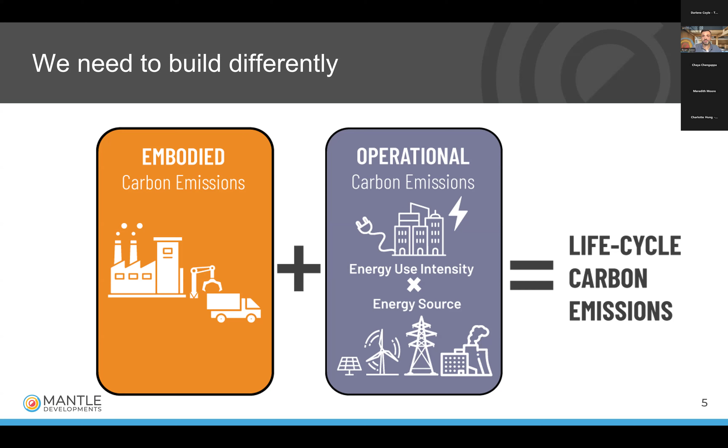So to jump right into the embodied carbon discussion, increasingly we're describing the carbon footprint of buildings as having two aspects. One is the operational carbon emissions, associated with operating the building, so heating, cooling, lighting, ventilation. This is what we've been managing as an industry for the past 15 to 20 years through energy efficiency requirements in the building code and through decarbonization of the energy system. But we're increasingly realizing there's a very large carbon footprint with creating the materials and creating the buildings. That's what we mean when we say embodied carbon emissions. And we want to manage both of these.

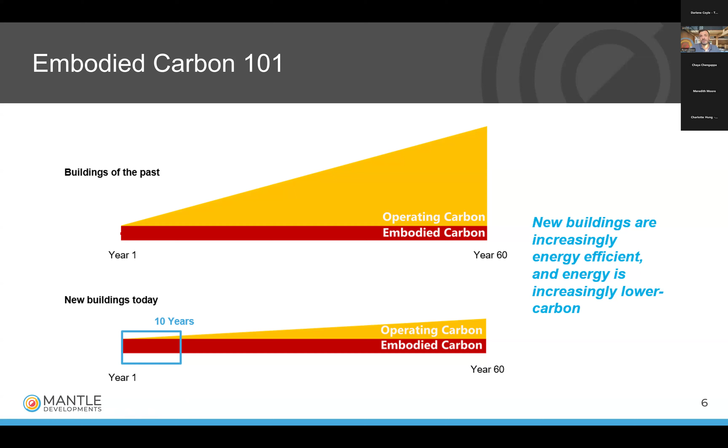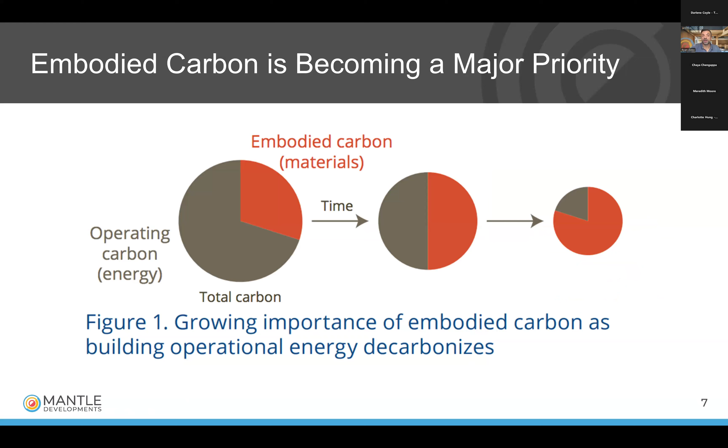When you add all those elements together, we're seeing a massive reduction in operating carbon, but very small change in embodied carbon. Looking at shorter time frames, maybe the next 10 years, new high efficiency buildings in low-carbon grid environments like Ontario have emissions that are almost all embodied carbon. Put another way, we're reducing operating carbon so effectively that in the not too distant future, the vast majority of a building's carbon emissions will be embodied carbon from creating the building.

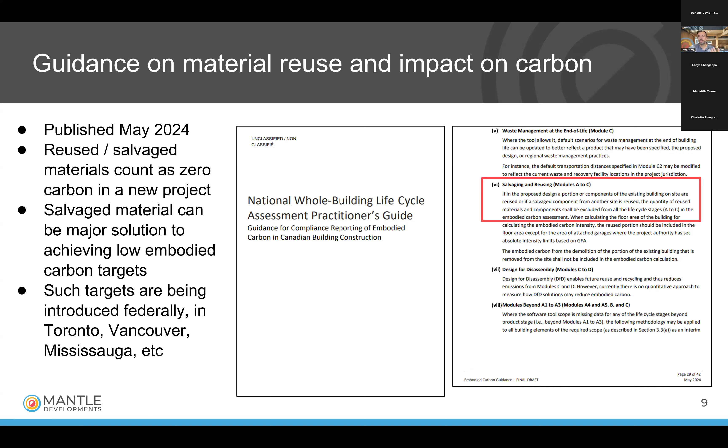As those caps come down over time, and it becomes increasingly hard to hit them as we have to do more to be low embodied carbon, using more salvage material will be one of the best and most cost-effective ways to reduce your carbon footprint, because it counts as zero carbon on your calculations. So that's the quick summary on LCA and embodied carbon.

I'll talk specifically about this toolkit that we've developed over the last year and a half. My team at Mantle and Kelly Doran's team at Half Climate Design has worked with the City of Toronto, including funding through the Atmospheric Fund.

We basically looked at how embodied carbon could be reduced through three different lenses that haven't been looked at previously in the Toronto area before. We wanted to look at how urban design can actually impact embodied carbon, so how things like amount of underground parking, overhangs, or step backs of a building. Those are all urban design requirements, but all of them have unintended embodied carbon impacts. So Half looked into that.

And then my team at Mantle looked into items two and three, which was procurement of low carbon materials, so setting some requirements around what a low carbon material might look like in terms of purchasing. But the third one, which is relevant to this discussion, was around circularity and basically how to value the carbon footprint in existing structures and materials.

And think about ways that the city could promote reuse of buildings and reuse of materials. So as part of this process, we looked at what Toronto's currently doing, what are best practices globally around these topics. We had working groups with dozens of people from different City of Toronto divisions that discussed what best practices are out there and how Toronto might be able to implement them. So we've come up with some recommendations that I'll give you just some of the highlights of today.

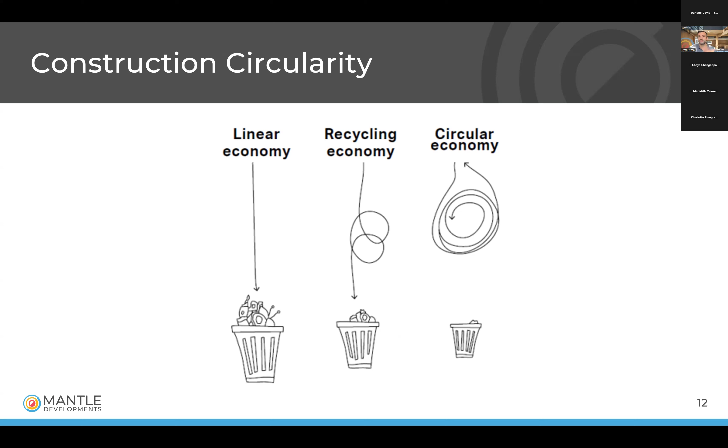And when we say circular construction, I really like this simple graph, which kind of really shows what we mean in a simple way. Instead of just making something, using it in one building's life, and then putting it to the landfill, we want to think about how we can increasingly reuse both the building itself and repurpose a building. But if a building does need to come down, maybe to do it in a thoughtful way to deconstruct it and then to reuse all those materials. So moving from the left to the right into a more circular economy.

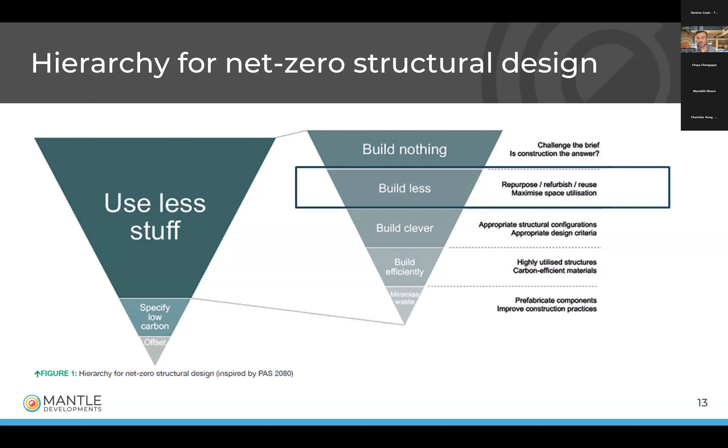And some of you may have seen this hierarchy of zero carbon design and what we can do from a design perspective to reduce the carbon footprint of our buildings. One of the most effective things we can do is to build less, to use less material and to reuse what we already have, right? It's something that we know how to do, we can do it, but our processes aren't set up in a way to incentivize that. And we do have some circularity in Toronto.

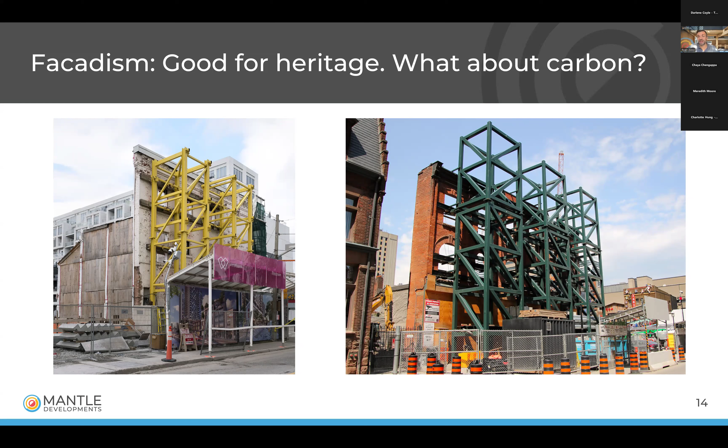So I'm not saying we shouldn't be doing this, but I'm saying if we're going to do this, let's save the structure behind the building as well. Let's save as much of the building as we can and try to find ways to reanimate it and bring it back to life, as opposed to just demolishing everything but investing a huge amount of carbon to save the facade, right? We can do better than this.

And the more I looked into this, dug into this issue over the past year and a half, the more I realized that there are many co-benefits with circularity. I started looking at it from a carbon perspective, but I realized that it really supports local jobs, it improves cultural heritage, it lowers carbon as I knew, but also has much less waste. So there's many benefits associated with reduced landfill impacts, means we need to use less resource extraction to create new materials, and it can lead to faster construction if we can find ways to streamline what's already there instead of going through a whole demolition process and a rezoning and a rebuilding, which can take many, many years.

So the more I learned about this, the more I became a convert and realized there's many co-benefits to successful circularity strategies. So just to touch on some of the very high level recommendations that we proposed to the city.

One is to support ways to have more adaptive reuse of buildings. So instead of demolishing a building, finding ways to incentivize people to use what's there and reimagine them.

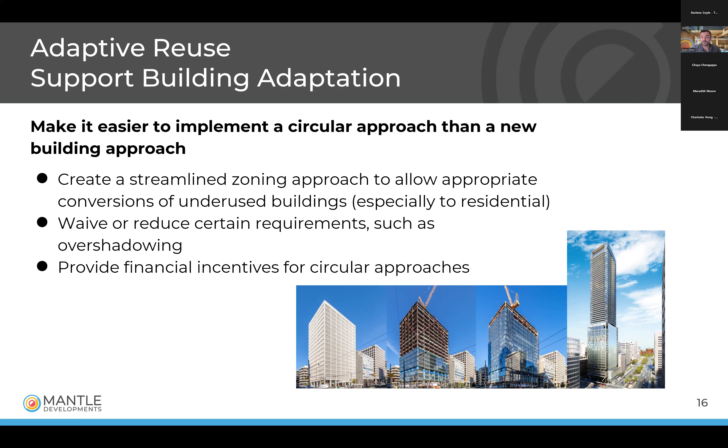Another really interesting thing we saw, especially from leading jurisdictions like New York City and London in the UK, was the requirement of pre-development and or pre-demolition audits. So before a project was approved to be redeveloped or to be demolished, for example, certain projects in those jurisdictions were required to do this audit.

They can be called circularity audits. There's a number of different terms used, but the idea is looking at what's there in a systematic way, recording it, and coming up with a plan to maximize the reuse of those things so that it's a condition of your approval that you have to do this and you have to have a strong plan.

I noted that the top two things on that voting at the start was lack of awareness education and lack of regulation, right? So this kind of ties into both of those, that there's a lack of awareness about regulation in many of these places.

And for example, the city of Toronto says, well, this is a provincial requirement, so it's not up to us to enforce it. And when I speak to the people at the province, they said, well, we just do random enforcement on this, and we look at a couple dozen projects a year to see if they're following it. And they said, most people are not in compliance with this requirement.

So I would suggest one of the things anyone that's involved in building approvals or in projects can do is follow this regulation because it's already there, and think about how we can really maximize what's already being asked for by the province.

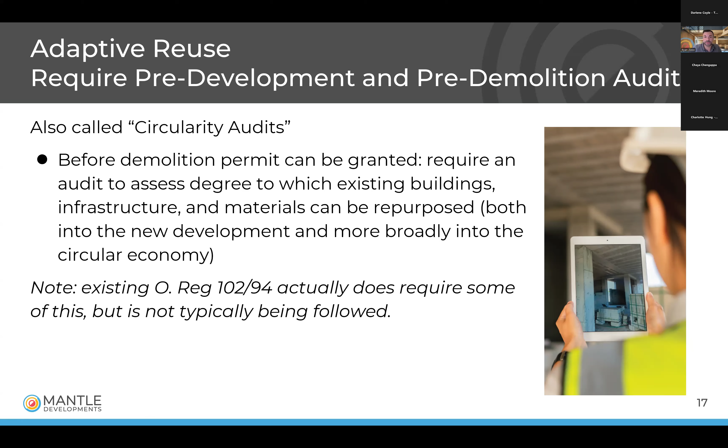There's also a really interesting approach we saw called the circularity decision tree, which, depending on the state of the building or the site, asks a number of questions: is the structure sound, is there cultural heritage here, and other questions that can lead to guidance on whether it makes sense to retain and retrofit the building, do a partial retrofit and refurbishment, or do a disassemble and reuse, or potentially a demolish and recycle.

So we were suggesting you could have a kind of decision tree like this, and then link it so that if you're doing what you're supposed to be doing, quote unquote, by the decision tree, then you get a low development fee, or you get some kind of a refund, because you're doing the low carbon approach. But if, for example, the tree says retain and refurbish, but you're actually proposing a demolition, then maybe you have a 10 times fee, for example.

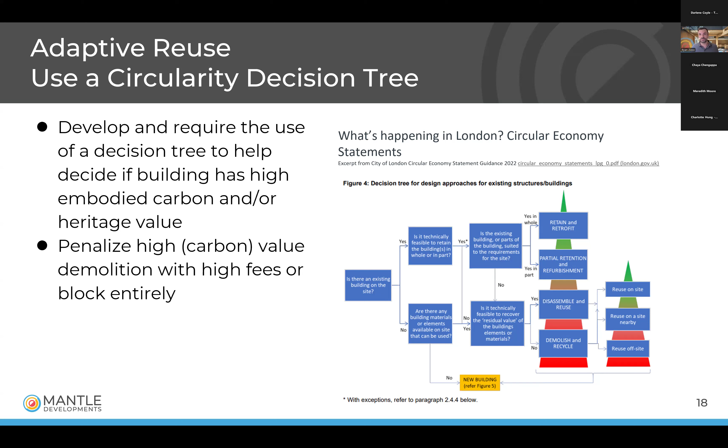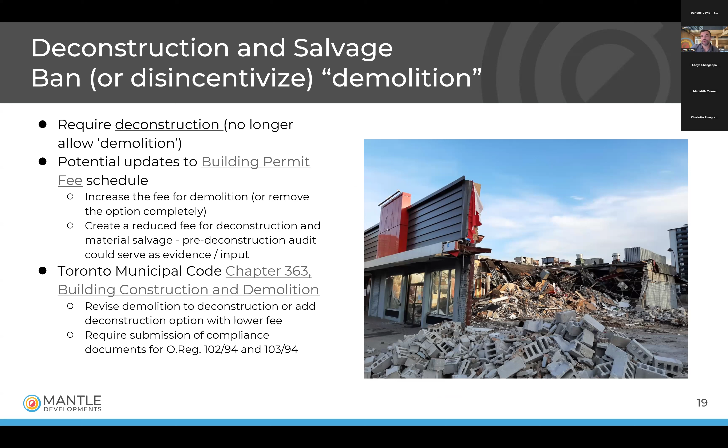So again, linking financial incentives to the lower carbon option. And then also we could talk about just banning demolition and having deconstruction and salvage instead, which is what Meredith is going to talk more about. We see more than 6 or 7 municipalities now in North America that have banned demolition and require deconstruction. So we went into some detail with the city on what specific building permits, municipal code, and bylaws they should revise if interested in moving forward with this.

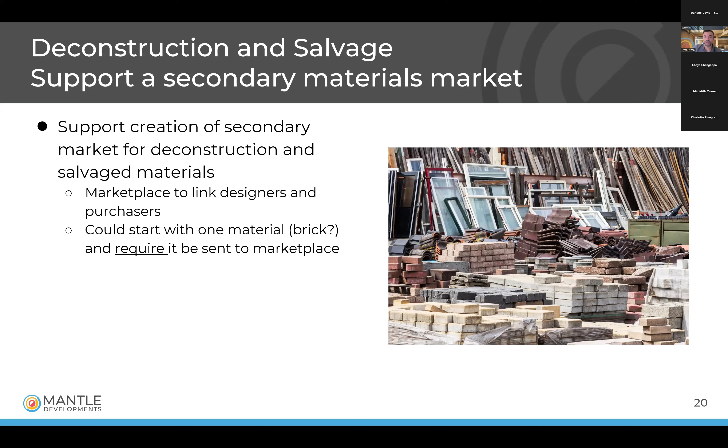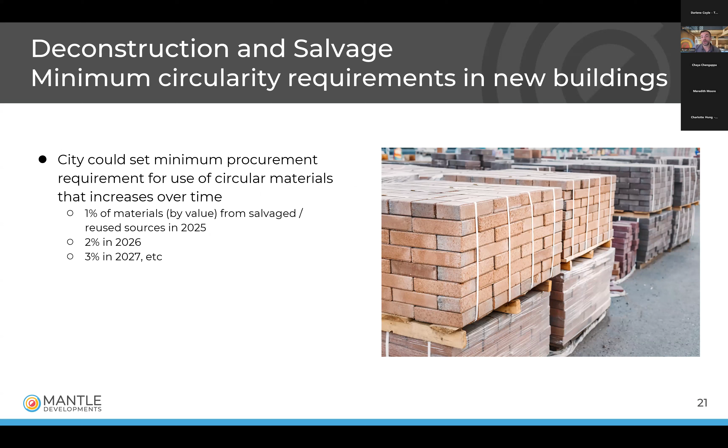We can also require more market development of secondary materials. That was something we heard from the project partners and Project Green team, and Meredith can speak more to that as well. Or if you're doing procurement of new buildings, thinking about requiring a minimum amount of salvage material—an easy procurement requirement could say 1% of materials on this project should come from a reused or salvage source, and ratcheting that up over time. These types of requirements in procurement documents would provide more demand for these types of materials in the market. So very interesting policy decisions could be made through that.

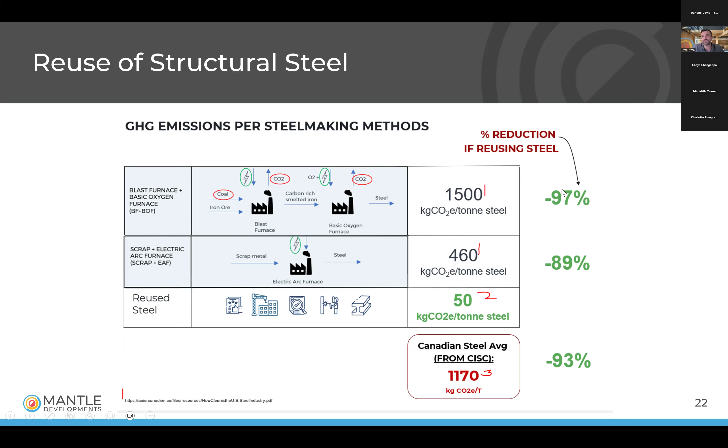This is just a slide I got the other day from someone working on a structural steel reuse project at the Parliament buildings in Ottawa, the Center Block, where they're taking out structural steel, having it refinished, new connections put in, and then reusing it in the structure. They're finding it's basically a 93% reduction to reuse the steel versus average steel from other mills, and if it's new production from a blast furnace, it's a 97% reduction. So we're talking about massive carbon savings by reusing these materials.

This toolkit is going to be published on our website within the next week or two—it's not there right now. There are some preliminary findings on the website now, but we're waiting for final approval from the Atmospheric Fund, the funder, to put it up. So feel free to check back at our website in a couple of weeks, or reach out to me by email and I'd be happy to send it to you once it's available. I'm going to end it there, and we can take questions after, but I'll hand it over to Meredith now. Thank you.

As Ryan mentioned, my name is Meredith Moore. I'm the founder of Ouroboros Deconstruction, and I'm excited to be here today to talk to you about deconstruction and material reuse and how it can play a part in making construction circular.

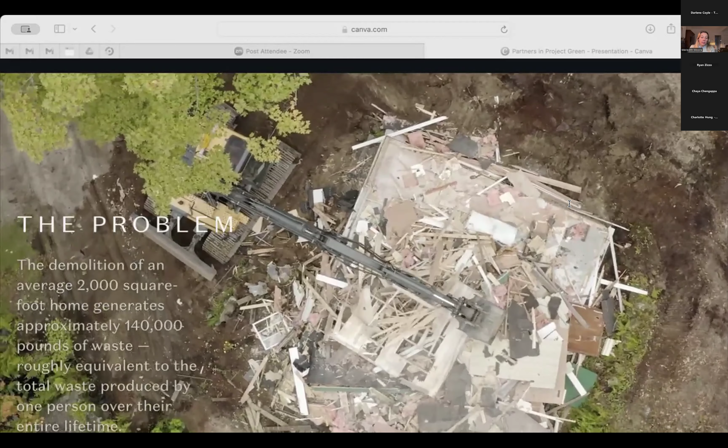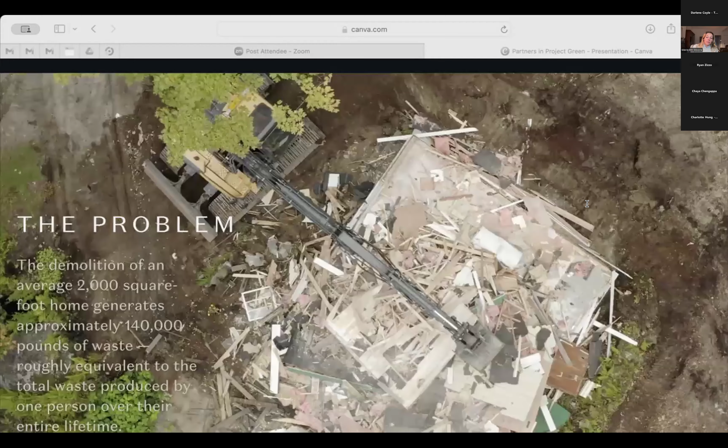The image on the screen is a common sight in many neighborhoods around Toronto and throughout Canada. Currently in Toronto, we have over 2,700 active demolition permits. I read a statistic yesterday that said both in 2022 and 2023, we saw a 30% increase year after year for residential demolition permits pulled. For reference, the demolition of a 2,000 square foot home produces about 140,000 pounds of waste—the equivalent of one person's lifetime waste production—which is an incredible amount of material ending up in the landfill right now. This volume represents not only a loss of economic value, but creates demand on the solid waste management system and drives increased consumption of virgin materials.

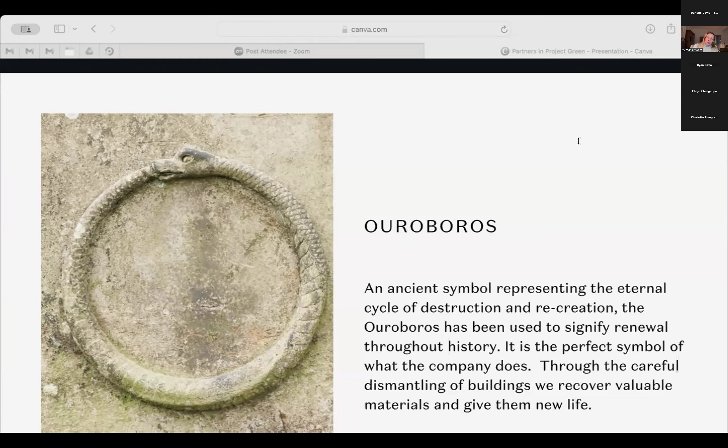To try to combat this problem, I started Ouroboros in 2022 with the goal of creating a full circle approach to material recovery. I chose the name Ouroboros because I'm a bit of an art historian nerd, and it's a perfect symbol of what our company does. Through the careful dismantling of buildings, we recover valuable materials and give them a new life. I really like the idea of self-cannibalization, or using the existing building stock as a resource to feed new creations.

At Ouroboros, our goal is simple: we want to make deconstruction cost-effective and accessible, and we're aiming to change the way demolition is conducted so that materials are salvaged and widely available as a resource within the community. We work across residential, commercial, and large-scale redevelopment, and we run the gamut on projects from small selective interior deconstructions to reclamation audits to full-scale structural decons.

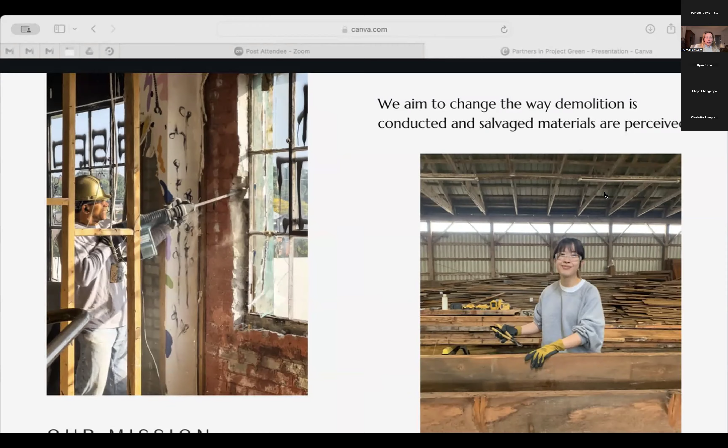While demolition is now the standard, it wasn't always this way. Before World War II, deconstruction or hand demolition was the norm, and materials were carefully salvaged for their economic and practical value. The shift to mass demolition in the 40s prioritized speed over existing resource preservation.

During a deconstruction, we're carefully dismantling the building in stages, and I like to say we're taking as much care removing the materials as the initial trades did who installed them. By dismantling in stages, starting with interior finishes and moving on to the structure, we're maximizing salvage potential and ensuring non-salvaged items are sorted for higher recycling rates, which helps us achieve around a 90% diversion rate from landfill on all of our projects.

Our deconstruction projects typically employ 5 people on site daily, offering low barrier job opportunities. We're very proud that our team is 50% women, so it's a great way for us to help get more women into the trades.

A traditional demolition is very disruptive to the community. They're noisy, they produce a lot of dust and airborne pollutants. Deconstruction is very different. We often have neighbors come up to the job site and just thank us for what we're doing. They're calmed by seeing that even though the building is coming down, these materials are going to be reused and live on in some way.

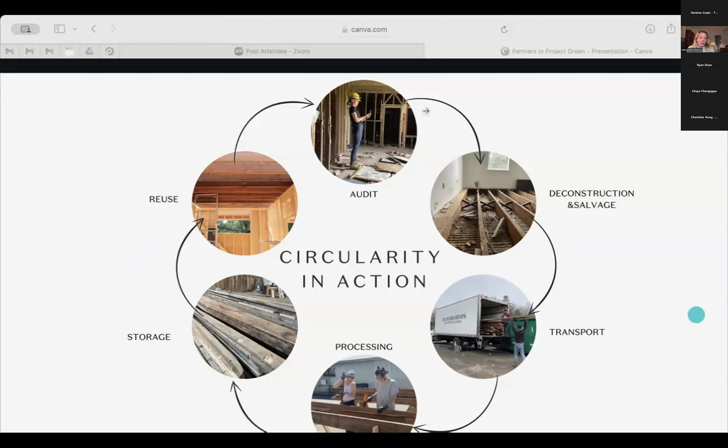I think you get the point that if this is done correctly, materials could be reused long past the point of the original building coming down, and depending on the material type, could really be reused in perpetuity.

We see deconstruction as a vehicle to get to the materials for reuse. To understand what kind of material we're dealing with on our projects and what it's going to be used for, we always start with a reclamation audit, or what Ryan called a pre-demolition audit.

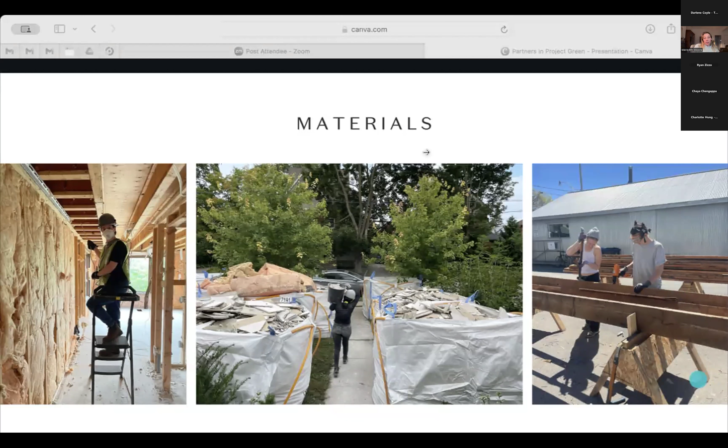A reclamation audit identifies materials with high reuse potential in buildings slated for demolition. These audits document the dimensions, quantities, the conditions, environmental impact of materials, and they help us to create detailed inventories.

These inventories then go on to serve multiple purposes. They're informing building owners and designers about on-site reuse opportunities. They help us advertise our salvage materials to different professionals, and then they guide the demolition or deconstruction team through the project to make sure the building is dismantled carefully and the materials that will be salvaged for reuse are taken out carefully. What we find is that they support decision-making for effective reclamation. They really start the conversation between the project stakeholders.

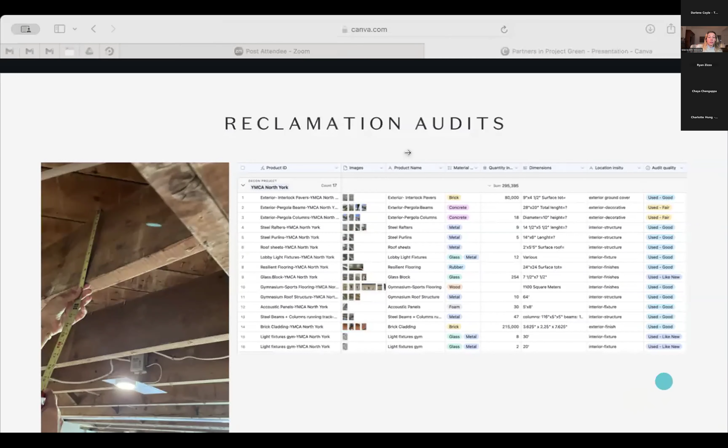To better illustrate the process, I'd like to do a deep dive into the North York YMCA project, which we're very lucky to be working with Ryan and his team at Mantle Developments on. This project really highlights how collaboration and early engagement can help maximize material reuse. We're working with the YMCA leadership, the project architects, and the engineers, and through all of us, it's helped identify materials with high reuse potential across their various campuses and in the new build.

What we found is that the North York YMCA offers an incredible opportunity for material reuse. It was built in 1979, and had some subsequent renovations after. There are extensive exterior grounds and tons of different types of materials to work with. We identified about 20, but when we later walked the campus with the engineering and architecture team, they were able to identify even more that could go into the new design.

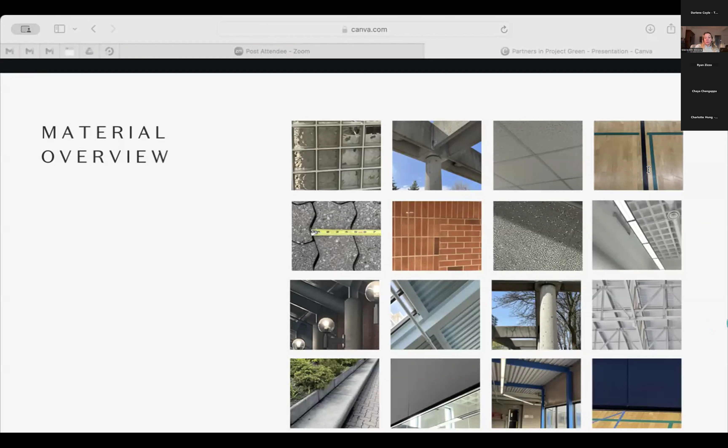We found about 80,000 concrete dry set pavers that were looking for a new home, and we might have found vintage and modern light fixtures, gym flooring, acoustic panels, and many different types of structural steel.

When considering which materials to reuse, we prioritize three factors: environmental impact, ease of reuse, and materials with cultural significance, like the iconic brick synonymous with the YMCA's identity.

When we were walking the YMCA, we had a few different gym members come up and explain what an impact this space had on their lives. They had brought their children here when they were younger, and in retirement they were going here daily. They were really happy to know that even though this YMCA wasn't going to remain standing, the materials could go on, and that maybe they could see some of the brick they were so familiar with and associated so many memories with be reused in the new design.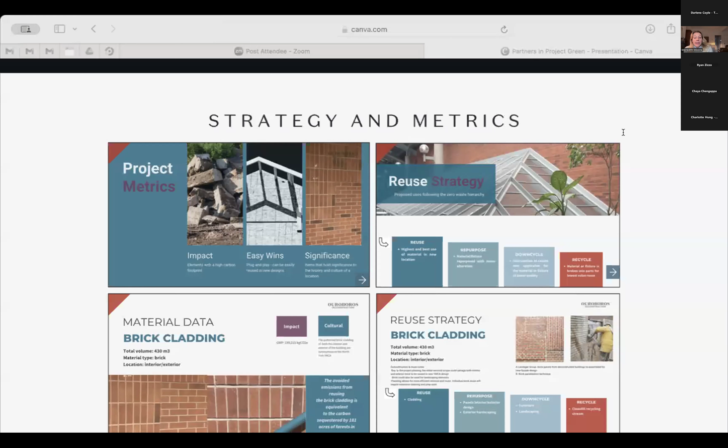We also considered deconstruction potential, how items could be reused, and the recycling pathways. For instance, vinyl wall base is easily removed and could be reused with minimal reprocessing, but there are very few recycling options for it right now, and it has a pretty high embodied carbon impact. So this made it a perfect candidate for reuse.

Through on and off-site reuse and other diversion tactics, the items we identified in this project have the ability to make a really big impact. Reusing these materials is equivalent to the greenhouse gas emissions from driving over 1,000 gasoline-powered cars for a year.

What we found is that by involving the stakeholders early, we have started to effectively plan for harvesting, storage, and reuse. We've already started to talk to different companies and government entities to figure out places we could deploy these materials.

Obviously, 80,000 pavers is an incredible number to find a new home for, but we are really excited that we've started to divert at least half of that to another project.

So after a reclamation audit, the next challenge is finding reuse pathways for the materials that won't be reused on site. Building strong networks is essential, and many are still really informal. Regional marketplaces for reusable materials have grown, but there's not really a unified system out there to sell this material. Regulatory hurdles like recertification also limit the reuse.

One way that we're starting to address these regulatory hurdles is that we've developed recertification for our salvage lumber. Our lumber regrading process has really been a game changer for us.

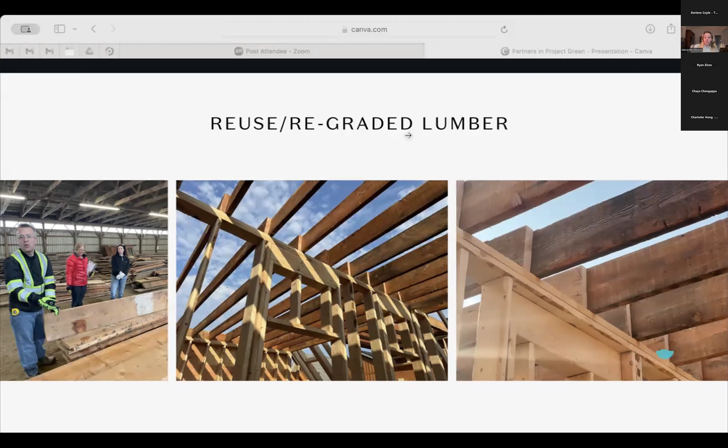When we're not using our lumber for structural purposes, quite a bit of it is repurposed into products such as flooring, furniture, and decorative finishes. Here you see it being reused by some artisans and also as wall paneling.

We are also working with artists who are looking to incorporate salvage materials into their designs. This is from University of Waterloo for Winter Stations.

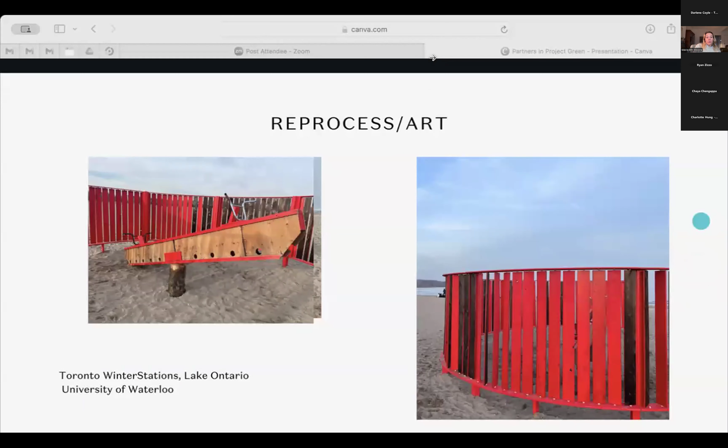And then material that generally we would have sent to recycling, we're starting to look at different ways to reprocess. We've started to work with local manufacturers of NLT, nail laminated timber.

We worked with a colleague, Haley Anderson, to start figuring out biochar, which is a soil additive from basically offcuts from our lumber that goes through a slow burn. It can keep a large amount of carbon, and it also has nitrogen and other things that farmers are really in need of.

We've also started to bring large-scale chippers into some of our projects so the material can just stay on site. We basically chip down the offcuts that would have otherwise gone for recycling, use large-scale magnets, and then they can go into landscaping or other backfill.

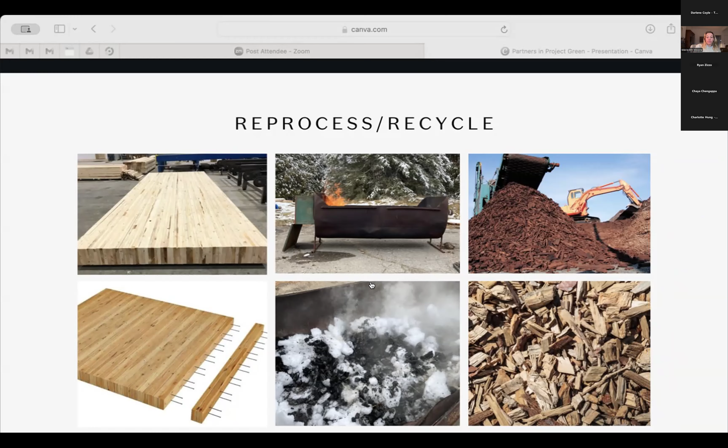So to finish, some of the key market challenges facing reuse organizations in deconstruction right now. For most deconstruction companies operating in urban centers, warehousing space is a really big problem for us, which is something Ryan touched on. The infrastructure is really lacking in places to start storing these materials, and that's something we have to start thinking about as we operate at scale.

Recycling partners, where we know our materials are going to secondary markets, it's always difficult for us depending on the project and the timeline. Recycling is a bit of a commodity market.

Most of the time wood gets recycled, but we've had projects where partners say there's not a good price for it right now, so it's not going to be recycled. Obviously, we didn't work with them, but it's always something where we're calling and looking for reliable partners to work with.

In Toronto right now, we don't have any kind of incentives or mandates for deconstruction, and we're up against very efficient and cost-effective demolition companies. So any types of incentives, whether that's expediting deconstruction permits or some of the other incentives Ryan talked about, would be hugely helpful.

And then also just kind of reframing this idea around material reuse. There's a lot of regulatory red tape on certification, and helping to make that process less opaque and getting engineers, designers, and architects more comfortable with reusing material is something we all have to work on.

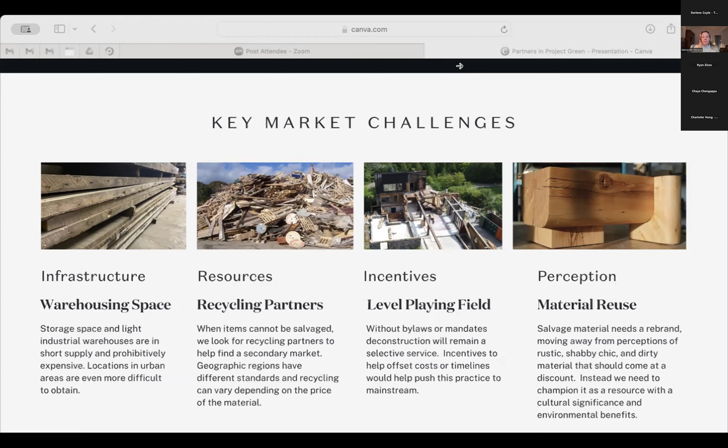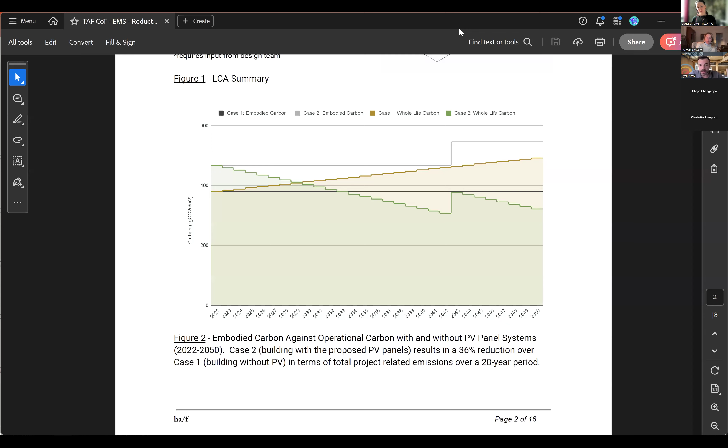So basically without the solar, the embodied carbon of the building was this black line. And then when we added the operational carbon, that's the yellow line, so you can see the carbon footprint of the building goes up over time as the operations go in. When we added solar, it increased the embodied to here. So this was the difference, this carbon footprint of adding solar, but the total carbon went down every year because we were offsetting some of the energy use.

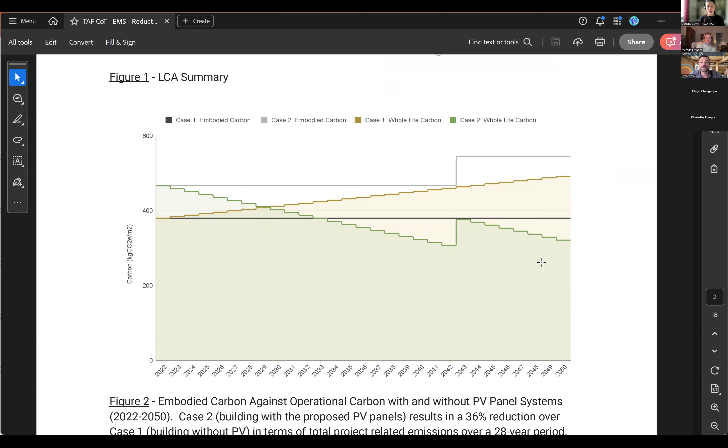So basically after year 7, the solar version of the project was lower carbon than the non-solar version. And then even when we replaced solar in year 20, you can see a jump there, that's when we put in all new solar panels. But ultimately, this was the change between the solar and the non-solar project. So it was about 7 years on this project to be lower carbon with the solar option.

Thanks, Ryan. I think you've answered that question. I think the second one is for Meredith: where do salvaged materials get stored until their next use?

We have a warehouse we currently operate out of. So if they're not being stored on site to be reused in the new design, then they come back to our warehouse with us, and we're located in Leslieville.

Okay, and so we have other marketplaces as well that have storage space. So certainly there is some, although I do understand that that is quite the barrier. Storage can become a barrier over a period of time, so we'll have to solve that issue as well.

Absolutely, the next question. Yeah, and that was one of the things we discussed with the City of Toronto, and they seemed to have some potential interest in helping with that. They said one thing the city has is space, right? They do have lands and old buildings that they could potentially repurpose. So if anyone has the need for that type of space, reach out to me and I can maybe connect you with some of the folks I have been speaking to at the city about this. Thanks, Ryan.

Another question, I think again to Meredith: where are you selling salvaged material? Is there a good market for them? So we have a website.